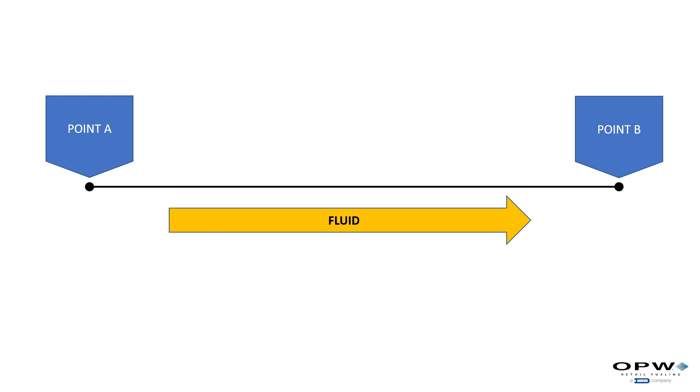So actually the way a gas station works, it's pretty simple. It's basic fluid mechanics or fluid dynamics. We're really just transferring liquid or fluid from point A to point B. But in our case, that liquid is gasoline or diesel or some other type of fuel. So we'll go over what happens in between there, how we keep that liquid out of the ground, how we keep those vapors out of the air, and the individual components that fall into place as we transfer that fuel from point A to point B, or from the tank to your vehicle.

So when we first did this video about 8 years ago, it ended up being about an hour long. There's a lot of information to cover.

But what we wanted to do this time is kind of break it up into segments or modules. So you can watch one segment and then maybe come back, pick up on the second one, and then pick up on the third one. Or of course, you can always just watch all 3 or 4 consecutively if you'd like.

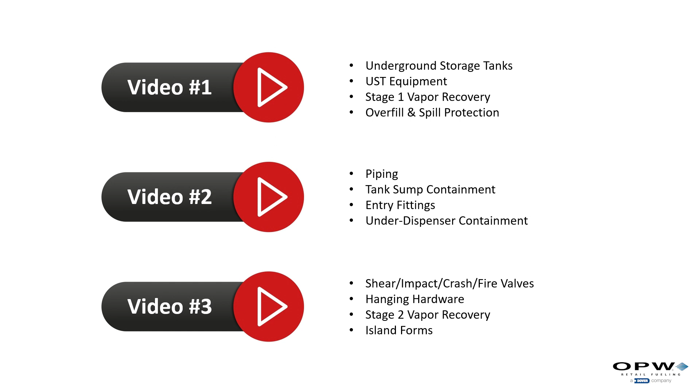So there's really 4 components or 4 things that have to happen at a gas station to be able to get our liquid or our fuel from point A to point B. Number one, we have to have a way of storing that fuel in some type of vessel or container. That way it's there when we're ready to use it. Number 2, we have to have a way of refilling that vessel or that tank. Number 3, we have to have a way of transporting that fuel from point A to point B, or from the tank to our vehicle.

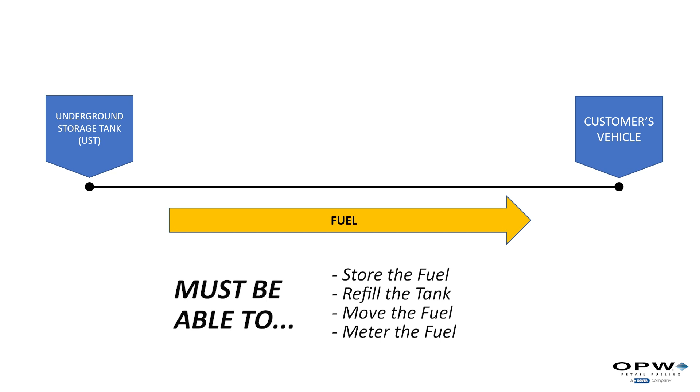And then finally, we have to have a way of measuring that fuel as it leaves the system and goes into our vehicle. So that's kind of what we'll focus on and how we'll break down our segments throughout the video. So let's talk about that first component, and this will be the first segment of our Retail 101 video. We're going to talk about how we store that fuel in the ground.

So in the case of retail fueling sites or gas stations, the way we store that fuel is in what we call an underground storage tank, or a UST. So I'm warning you right now, throughout this video, the petroleum industry uses a lot of three-letter acronyms. So I'll try and explain them as we go on. So the first one will be UST, underground storage tank. And that's where we put the fuel at the gas station.

And there's a couple reasons why we put that fuel in an underground tank versus an above ground tank. First of all, these tanks are pretty large. They can hold anywhere from 8,000 to 30,000 gallons of fuel. So you can imagine a tank that large sitting above ground is going to take up a lot of room or a lot of space at our convenience store. Plus, it's a lot safer if we just put them underneath the ground. They're less likely to be hit by other vehicles or crazy things that can happen above ground. So, really from the very beginning, we put these things underground.

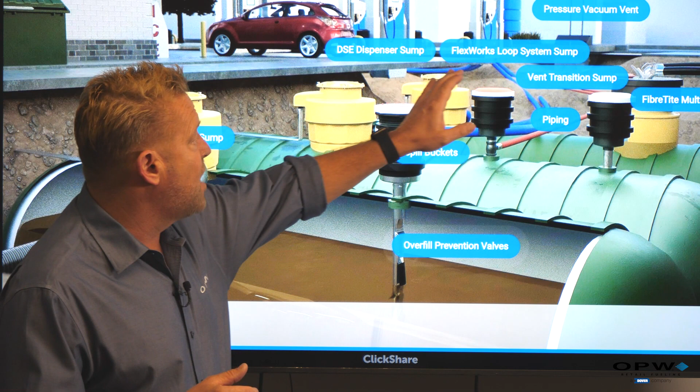And they're typically buried anywhere from 3 feet to 6 feet under the ground. Over top of them will be what we call a tank pad, it's usually about 6 inches of concrete. And then on top of that tank, we fill it with what's referred to as backfill, some type of rounded gravel or pea gravel, or sometimes they use sand depending on where the tank goes. But we put these things in the ground, like I said, to keep them out of the way and kind of keep them safe.

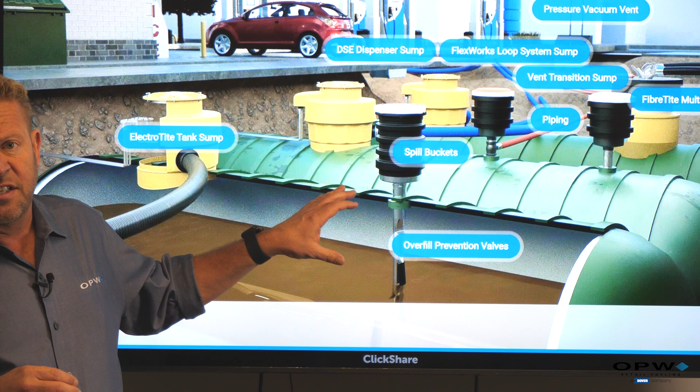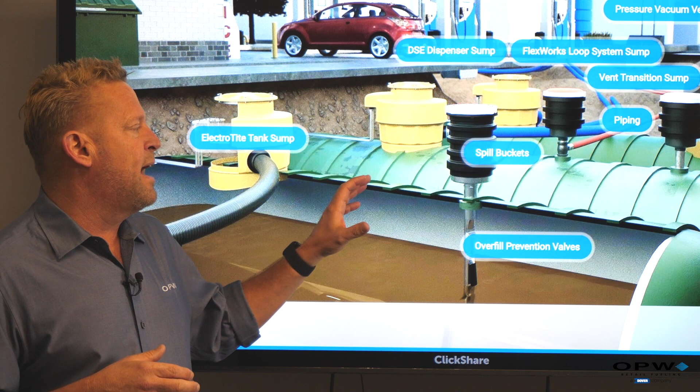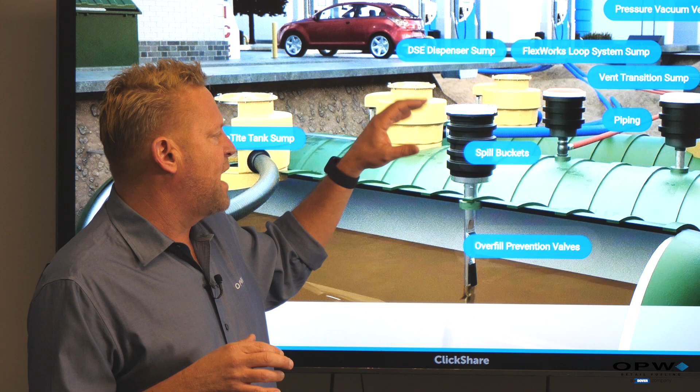In the early days, these tanks were made of steel. Again, large steel tanks that they buried in the ground. But if you think about it, the problem with steel: underground environment, a lot of moisture, groundwater, a lot of different things happen. So steel tanks were susceptible to corrosion, not only outside, but inside as well. With gasoline and water, water is actually heavier than gasoline. So many times throughout the system, if there's leaks or something happens, these tanks will end up getting water in them. And what happens is the water goes directly to the bottom of the tank, so the tank can also rust from the inside or the bottom out as well as the outside.

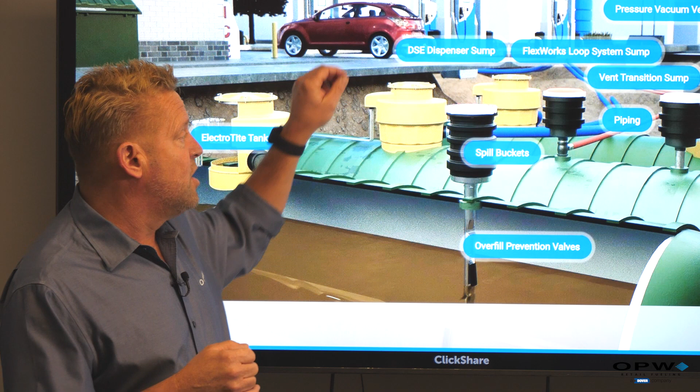So originally the industry started to try and protect the tanks from corroding by what they called cathodic protection. They put these, they're called sacrificial anodes, around the tank system, and these anodes were down in the ground. And the idea was, through chemistry and electricity, the anodes that would cause corrosion on the tank would actually be attracted to the sacrificial anodes and rust those out versus the tank. They were a little cumbersome, required a lot of inspection and testing.

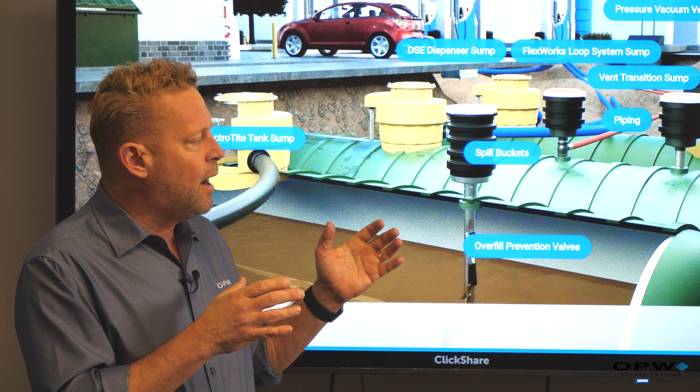So what the industry decided to do was kind of move from steel, or at least find better ways of protecting the steel. So a lot of the steel tanks, what you see now is a steel tank will be wrapped or lined with some type of composite material, whether it's a fiberglass material or some other type of composite material, to try and protect the steel tank from corrosion, like I said, both outside and inside.

But now, primarily, a lot of the underground storage tanks that we see going in the ground are made completely of fiberglass. Fiberglass is a good material. It's easy to form in big shapes, and it's completely resistant to corrosion and all the nasty things that happen under the ground, and also some of the crazy things that happen inside the tank with different additives and fuel types. So fiberglass, whether the entire tank is made of fiberglass or whether the steel tank is lined or coated with fiberglass, it's kind of the norm for today as these things go in the ground.

Originally, these tanks were just a single wall, but the EPA, and there's another three-letter acronym that I use quite a bit, EPA, again, their job is to protect our environment. So a lot of these tanks, when they started leaking, the EPA said, okay, we need to try and correct this. So EPA started requiring double wall tanks, and we'll use double wall a lot in this video because it applies to a lot of the other components, but we'll first start with the tank.

So what I mean by double wall, it's basically a tank inside of a tank, or a tank outside of a tank. So the idea is you have a primary container, and if that container fails, you have a backup, or what we call secondary containment. And that makes these tanks a little bit safer in the ground, less likely to leak.

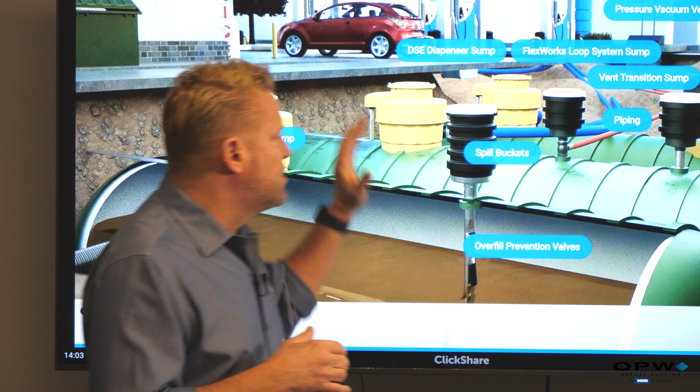So our tanks, double wall, usually either made of fiberglass or coated or lined with some type of fiberglass. We bury those things in the ground. Typically 3 tanks is pretty common. We'll have one for each type of fuel. Usually one tank will be for the regular fuel, one tank will be for the premium fuel, and actually they kind of blend those at the dispenser to make the mid-grade, but we'll talk about that later. And then maybe our third tank is diesel or some other type of fluid or fuel that the site wants to sell at their station. So we bury these things below ground.

So as they're sitting under the ground, the next thing we'll talk about is these tanks need to breathe. Gasoline, actually, the thing that's fascinating about gasoline is it's a liquid that really, really wants to be a gas. That's why it's really a good fuel in internal combustion engines and burns very efficiently in those types of engines, because it wants to be that vapor or that gas to ignite, and it's what, like I said, moves our internal combustion engines. So what happens is, as gasoline sits in that tank, it begins to vaporize and become vapor. But as that happens, it actually builds up pressure.

I think a great example of this is if you think about the gas can that's in your garage. If you've got a plastic gas can, and if it sits over a long period of time, you see it kind of starts to bulge a little bit or stick out a little bit. And then when you open it, you'll kind of hear it release pressure. Well, what that is, that's the gas sitting in your gas can, and over time, it starts to vaporize or evaporate and build up pressure, and that pressure needs to be released. Well, the same thing happens with our underground storage tanks. As they sit, gasoline vaporizes and builds up pressure.

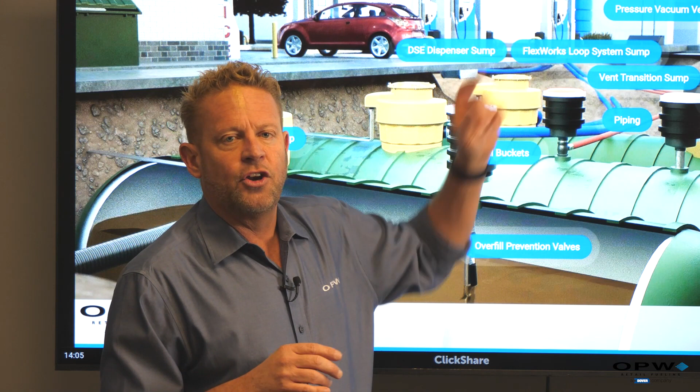So if those tanks were tight and we allowed them to build up pressure, that could create a problem. The tank could crack or explode, heaven forbid, and we'd have a nasty situation. Again, everything we're trying to do here is to keep gasoline out of the ground. So how these tanks breathe, we do it through a vent line. So there'll be a vent that's attached to the top of the tank and goes to what we call a pressure vacuum vent.

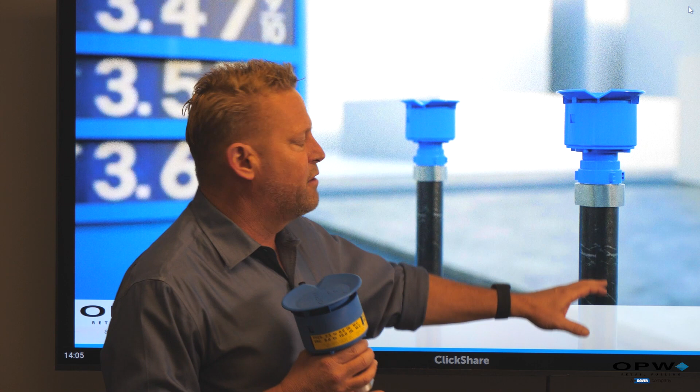Our vent line comes from the tank, and then it transitions underground, and then this is what we refer to as a vent stack. It's usually a 2-inch piece of galvanized steel. It starts underground from the vent pipe. Vent pipe's usually made of fiberglass or some type of flexible pipe material, and it comes up above ground, and the pressure vacuum vent is actually what allows that tank to breathe or maintain equilibrium or try and get as close to barometric pressure as possible.

And so the other thing that happens, if you think about an underground tank, is not only as the fuel sits there, it builds up pressure, but as people fill their vehicle, we're pulling that liquid out of the tank. So think of a milk jug. As liquid goes out, if nothing replaces that liquid, the thing will start to implode or cave in. So that's the other thing we want to try and prevent, is as liquid's pulled out, that tank builds up a negative pressure or a vacuum. So we need to keep that whole tank in equilibrium.

And that's the job of this little guy here called the pressure vacuum vent. It sits on top of the vent stack, and its job is to maintain the pressure within that tank. So the EPA, along with some of the Air Resources Board, specifically CARB, they kind of set the standard of how much pressure we want to keep in that tank before it opens. Obviously, you don't want it open all the time because the gasoline vapors would just be going into the air and causing pollution. And you don't want to have too much of a negative pressure. So these things need to open at various pressures or negative pressures or vacuums. So they kind of set what those ranges are.

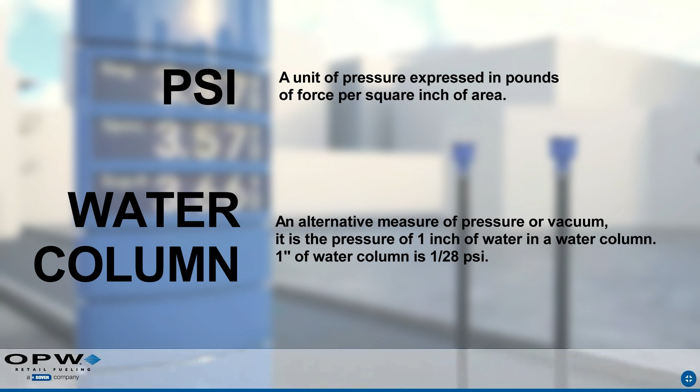And the way we measure these, it's in really small increments of pressure. You probably know what a PSI is, a pounds per square inch. Well, the way we measure pressure in a tank is with inches of water column. And just to give you an idea of how small of an increment this is, there's approximately 28 inches of water column in 1 PSI. So we're talking really small amounts of pressure or vacuum. So this vent is actually set anywhere between 2.5 and 6 inches of water column. So when the tank reaches over 2.5 inches of water column, it opens.

And the way these work, the pressure, it's simply just a weight with a seal at the bottom. So that weight is designed to be tight, everything under 2.5 or 3 inches of water column. But as soon as we get greater than that, the weight would lift up or crack, and that tank would kind of come back into equilibrium or come back into pressure.

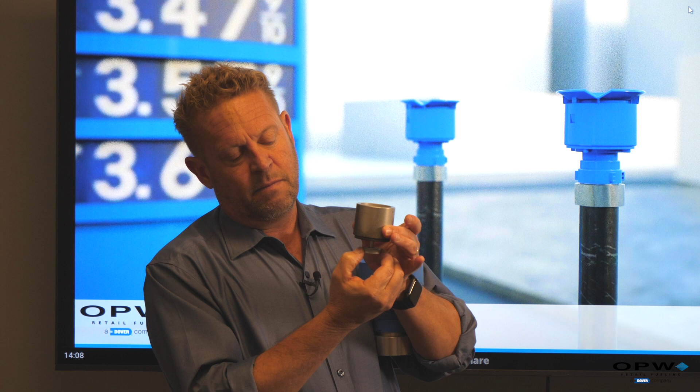So on the opposite end of that, as we take fuel out of the tank, we build that vacuum or that negative pressure, and this vent is actually set at between 6 and 10 inches of water column, which would be basically a negative pressure or a vacuum. And the way that's regulated is on our vent, there's also what we call a poppet that's spring-loaded, and as we reach that vacuum level, the poppet will be drawn down, and the tank again would be kind of brought back to equilibrium. There's a screen in there that just keeps debris out, and then obviously a cap because we want to try and keep water out of the tank.

So when that liquid becomes a gas or a vapor, those vapors are comprised of hydrocarbons. And actually the term that we use, another three-letter acronym for you, is a VOC, a volatile organic compound. And as those gasoline vapors get into our atmosphere, that's kind of what creates a lot of pollution and smog. So the EPA and the Air Resources Board, they monitor air quality, basically county by county in each state, and make sure that there's limited numbers of these VOCs in the air and the atmosphere to try and eliminate or knock down as much pollution and smog as possible. So again, we want to try and keep those gasoline vapors out of the air, and the pressure vacuum vent is one of the ways that we do this.

So if you pull up to a gas station, it's pretty easy to identify and see these. Like I said, they're 2-inch pieces of pipe that come up from the ground. There's usually one per tank, so you'll see 3, 4, or 5 lined up.

They typically put these vent stacks on the edge of the property, or they may be on top of the canopy or on top of the store. But if you notice, they're always kind of raised up above. There's actually a requirement that this pressure vacuum vent on top of the vent stack needs to be at least 12 feet in the air.

And the reason that we do that is gasoline vapors are actually heavier than air. So if we had that vent releasing some of these vapors as it opens to bring the tank into equilibrium, if it was low to the ground, the vapors could collect around the ground, and if someone walked by with a lit cigarette or something, we could have a bad situation, an explosion, and so we want to try and prevent that.

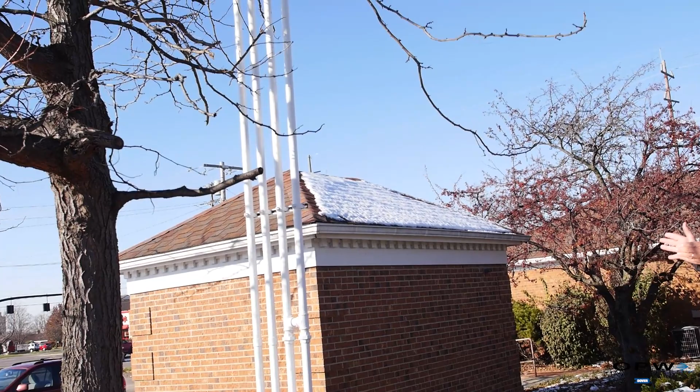So behind me are the vent stacks. They're usually at the very edge of the property line. You can see that they're more than 12 feet up in the air, and again, that's to disperse the vapors. This particular vent stack has two pressure vacuum vents up there. That would be for the unleaded and the premium tank, and the other vents are actually open vents for the diesel tank. Remember, diesel doesn't vaporize like gasoline, so diesel can have just an open vent. It's not required to have a pressure vacuum vent.

So these are what our vent stacks look like, at the edge of the property line and at least 12 feet above grade. So that's how we store our fuel. Big tanks underground, a vent line, and some type of pressure vacuum vent or an open vent is what keeps everything in equilibrium and keeps our tanks from exploding or imploding or cracking or causing a mess.

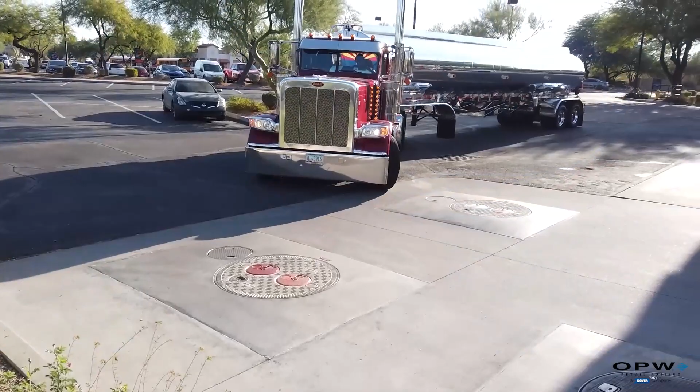So we have these big tanks underground, anywhere from 8,000 to 30,000 gallons of capacity. But how do we get fuel into those tanks? As people fill up, those tanks empty out, so we need a way to get fuel back into them. You've probably seen the big transport trucks. They're usually big stainless steel things going down the road, and they come from a terminal, and this is how we get our fuel to the site and into the tank.

All these tanks have a series of openings on top of them when they're manufactured. These openings are traditionally 4-inch. It's a female NPT flange or fitting that's built into the tank. We actually call it a bung, a bung fitting or a bung opening. And on these 4-inch fittings, what we have is called a riser pipe.

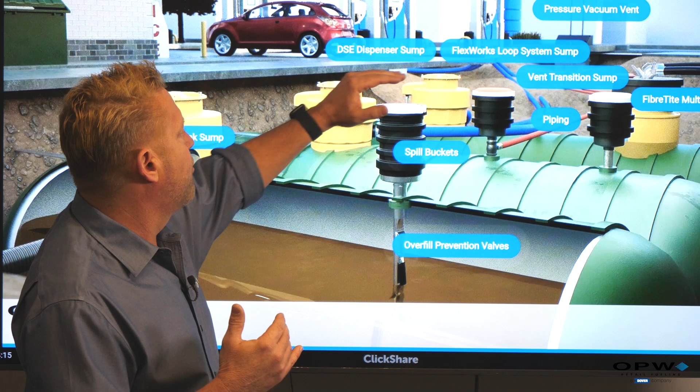And it's a 4-inch, usually steel pipe, Schedule 40 or galvanized pipe that goes from the tank to the surface, or to our grade. We refer to the surface here as grade or grade level for our tank pad. So how we access the tank in many different ways is in these 4-inch riser pipes that come up from the top of the tank, and it gives us access at grade.

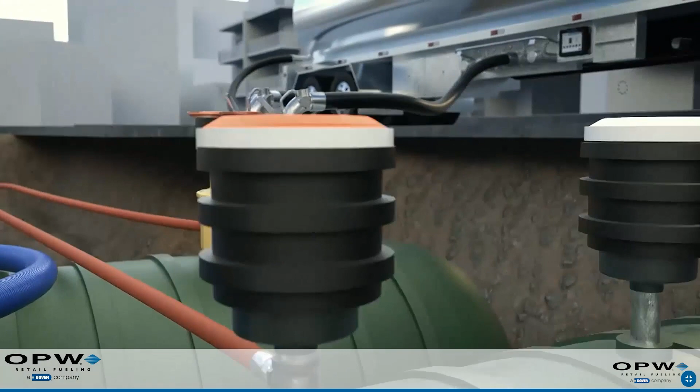So let's talk about how the fuel gets from the transport truck to the underground tank. The way this works is the transport truck hooks up a hose. We call it a drop hose. It's usually a 4-inch hose that it'll hook up to the truck itself. It comes through a hose, and then this valve here is called a drop elbow. It's almost like a big nozzle, if you will, but it's 4 inches, and it connects to what we call an adapter.

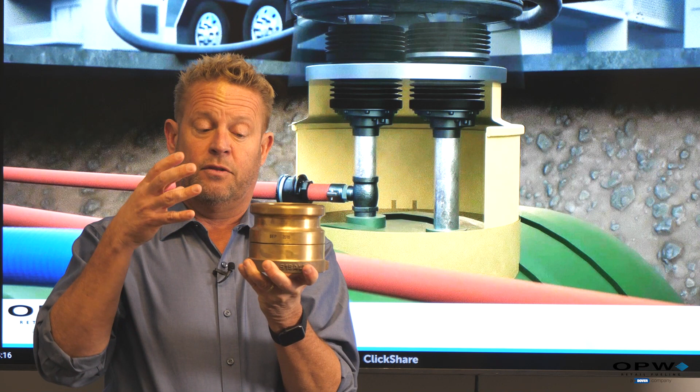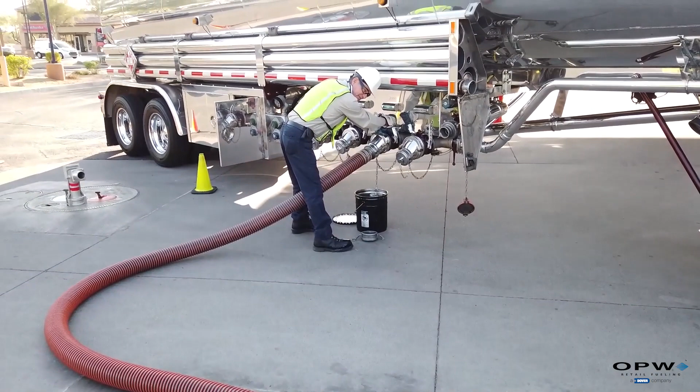And it's usually made of brass or bronze. The reason is that drop elbow is a different type of metal, and so you want bronze or brass to prevent it from sparking. Obviously, sparks at a gas station are not good, especially when we're dealing with large volumes of gasoline or vapors. So there's an adapter. We call this a tight fill or a tight adapter, and that drop elbow will clamp on there. Once he's clamped on the tight adapter, he'll go back to his truck, open a big valve at the truck, and now the fuel flows from the tanker truck down into the tank.

And the way that happens is there's no pumps really involved. It's just pure gravity. Think about it, the tanker truck is sitting up high, the tank's below ground. So as he opens up that valve, gravity just drains the fuel down into the underground storage tank, or our UST. Most of those tankers are usually compartmentalized, so one part may carry different grades of gasoline, and one part is diesel. So if you see these tanker trucks, you may see several of these valves on the side of the truck, and those are all different types of fuel as they drop from the tank into the underground storage tank.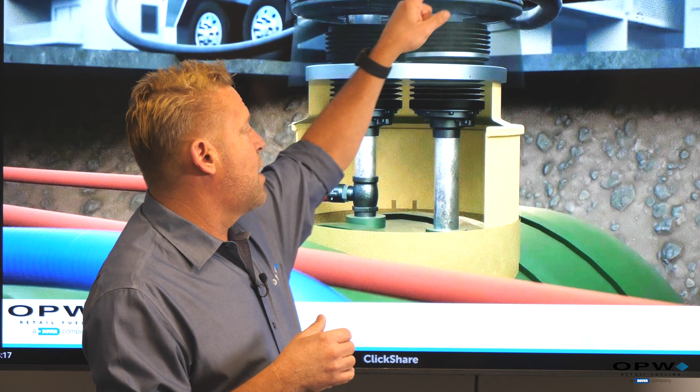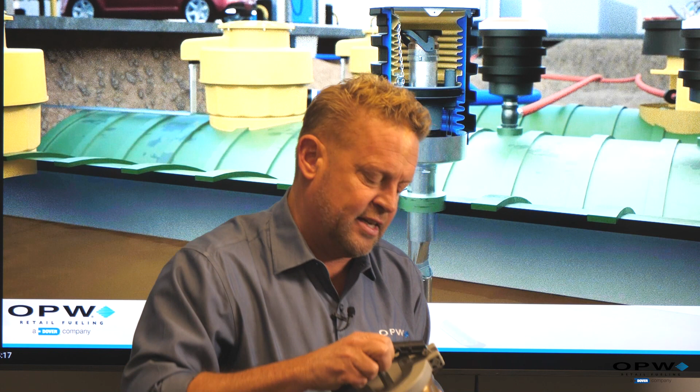Originally, when these tanks were filled, our 4-inch riser pipe came up from the top of the tank. We had our adapter threaded on top of the tank. Our adapter has a cap on it when it's not being used. Again, we want to keep those vapors inside the underground storage tank. So there's a tight cap that goes on our adapter. But this basically just came up from the ground at grade level, usually in some type of box or just a manhole cover to keep the backfill away so you could get your drop elbow on. So every time the driver made his drop and pulled off, there's always a little bit of residual fuel left in that drop elbow or the hose, and it would drip down and end up in our backfill.

A lot of the EPA regulations that we talked about actually came to be in the early to mid 80s as the EPA really got involved, noticing a lot of groundwater pollution, and a lot of it was coming from retail gas stations that had been in the ground for years operating in this manner. As they began to study where the fuel was coming from, they found out most of the fuel wasn't coming from leaking tanks or leaking components of the system. Most of the fuel was coming from these drops. Every time the tank was filled, there'd be some residual fuel, and over time, in the backfill, it turned out to be quite a substantial amount of fuel that caused problems.

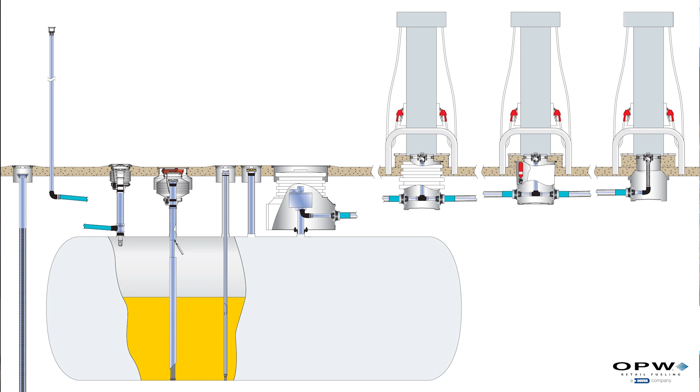So I'll go back to our other graphic here. So let's talk about our underground storage tank again and think about a couple things that happen. So if we have fuel in our tank, and if we're filling that tank, there's an area of our tank. Actually, I'll switch to another graphic here. It's a little bit easier to see on this two-dimensional drawing. But you can see we have our underground storage tank, and part of that tank is liquid or fuel. And everything above that is the empty space. And again, that gas has been evaporating or vaporizing. So what we have in that empty space above is gasoline vapor.

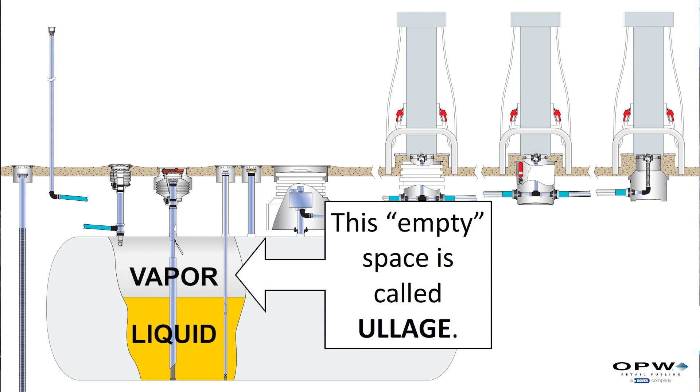There's actually a name for that empty space between the liquid level and the top of the tank. It's what we refer to as the ullage of the tank, or really how much capacity is left in that tank. So the ullage of our tank is comprised of these gasoline vapors. So our pressure vacuum vent is doing a good job of keeping those vapors in there unless the tank reaches a point where it needs to go back to equilibrium and the pressure vacuum vent opens. But primarily those vapors just sit there.

So if you think about this, as a drop happens, that liquid level is rising up, right? So those gasoline vapors are being displaced. They have to go somewhere. If we kept the whole system tight, the tank would crack, or we'd build up too much pressure in the system. So going back to the early days of gas stations, when a driver would fill the tank up, all those vapors that were in the ullage of the tank would basically just travel through the vent pipe and go right out the vent stack. So as he filled up, all those vapors were coming out at a pretty high rate into the atmosphere.

And again, it goes back to the late 70s, early 80s, as the EPA is trying to get a handle on pollution, and they started looking around saying, okay, wow, we got a lot of VOCs that are coming from these fuel stations, and every time a tank is filled, it's emitting all these hydrocarbon vapors. So the EPA told the industry, all right, petroleum industry, you got to figure out a way of controlling this. So what we came up with is what's referred to as stage 1 or phase 1 vapor recovery.

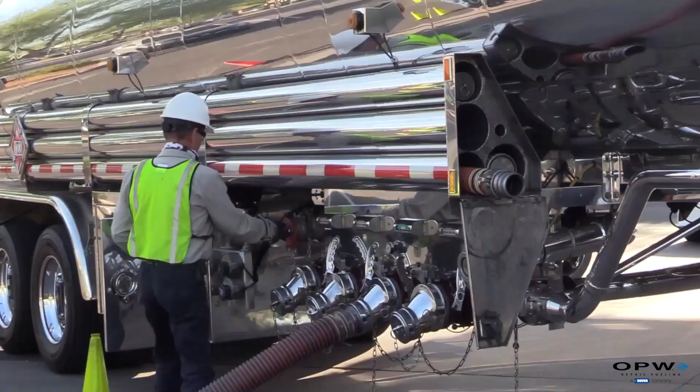So now, before the driver makes that drop, he has another hose on his truck. It's referred to as a vapor recovery hose. It's usually orange, they try and separate the two, and usually a bit smaller diameter. A vapor recovery hose is usually 3-inch. So what he does now is he'll hook up that vapor recovery hose also to his tanker truck along with his drop hose or fill hose. Because if you think about what happens, the underground storage tank is filling up with liquid and it's displacing vapors.

Well, really the opposite is happening in that tanker truck. You have a tanker truck where liquid level is now dropping, so you need to replace the liquid with air, or gasoline vapors in our case. So now he hooks up two hoses, the drop hose and the vapor recovery hose.

So what happens is, as the fuel level rises, the vapor now, instead of going out our vent stack, comes up through our vapor recovery hose and actually goes back into the tank. So he's collecting those vapors back in the tank. So everything kind of stays in balance. We prevent the vapors from getting in the air. And it actually turns out to be a good thing, because the vapors go back in the tanker truck.

And what they do is the tanker truck will take those vapors back to the terminal, and they have a pretty cool way of turning those things back to gasoline. They chill it and compress it and condense it, and they are actually able to take that vapor and turn it back into some liquid so they can resell it at the terminal. So better than going up and causing pollution, it's actually turned back into a liquid fuel.

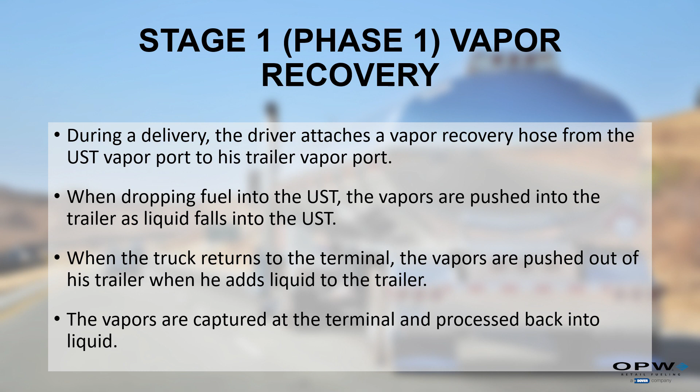So this whole process of collecting vapors from the tank during a drop is what we call stage 1 vapor recovery. So what I'm showing here is what we refer to as a 2-point fill. One point we're dropping, and the second point, we're actually collecting the vapor. So we have two different hoses. In some cases, especially in older tanks when we started requiring stage 1 vapor recovery, they may not have had enough openings on their tank to have a 2-point. So they will use what's called a single point fill.

And the way that works is there's one riser pipe and one hose, but the hose is actually what we call coaxial. Coaxial meaning kind of a hose within a hose. So on a single point, the fuel drops down the center, and the vapors come up on the outside of our riser or our drop tube, and then they go back through the hose. Again, in the center of the hose is fuel, and the outside is vapor. So they collect them through a coaxial drop tube. Actually, I have a graphic here that shows what that coaxial drop elbow looks like. You'll see the two hoses that kind of come up from there.

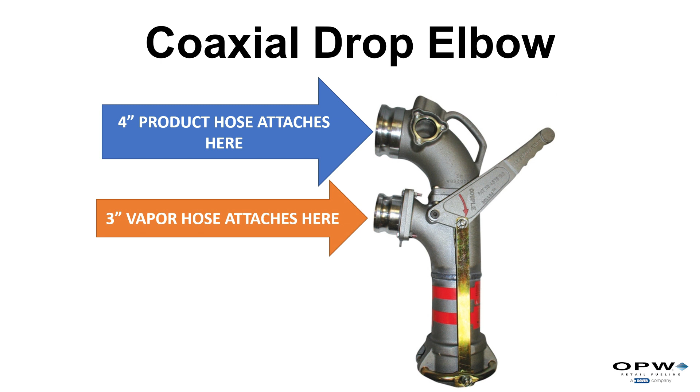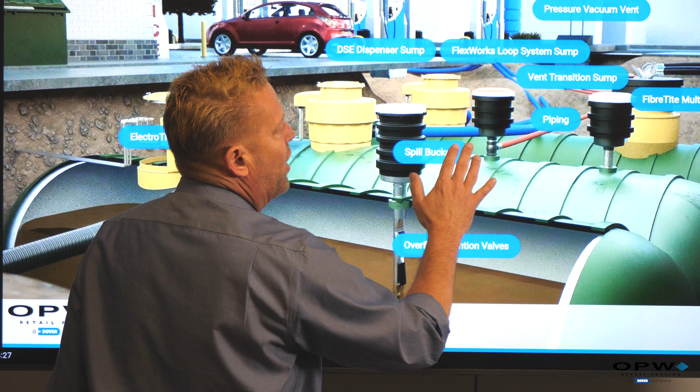These are actually pretty common in California, New York City. You'll see a lot of states utilize these, and the reason they do these is because you actually can have access to the top of this tank and your risers because you have this big chamber here. So that's what's referred to as a multi-port. But on the other type of fueling sites, this would be a little bit more typical. This would be our 2-point, where we have a spill bucket here and our vapor recovery spill bucket here, and the driver would hook up.

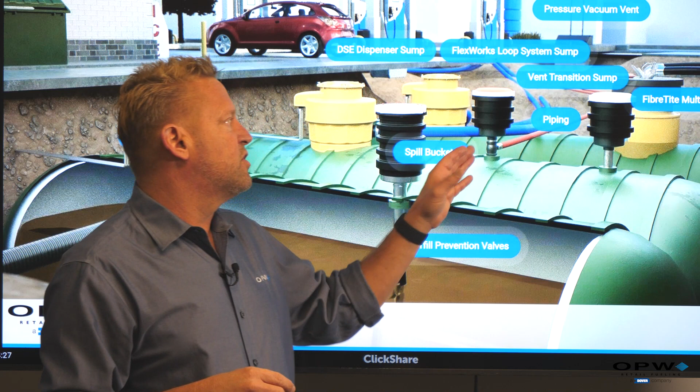Now at the stage 1 vapor recovery point, that can either be a spill container, or many times it's just a manhole to house that vapor recovery adapter. Because if you think about it, we're not dropping product in there, so if everything goes the way it's supposed to, you shouldn't have any fuel coming out of that riser pipe where our vapor and our vent pipe is. So that could also be just a standard manhole.

So stage 1 vapor recovery is a way for us to collect the vapors and keep them from going out into the atmosphere, and that's how we get our product from the tanker truck down into our tank to be used and sold down the line as you pull up and fill your car up. So we talked about how we get our fuel from the transport truck and into our underground storage tank. But let's think about this.

What happens if that driver's not paying attention? He opens up his valve, he starts filling the tank, doesn't pay attention, and that tank fills up. Or, say we have 4,000 gallons of ullage left in our tank, and he's got 5,000 gallons in his tanker truck and just starts filling and not paying attention and overfilling the tank. Well, believe it or not, it actually happened quite often in the 60s and 70s.

So again, getting back to the 80s, not only were the 80s the best decade for music, the best genre for music, but the 80s were kind of when the EPA really started realizing, okay, we have to start regulating and doing some things and adding equipment at these fuel stations to try and protect our environment. So again, going back to the 80s, a lot of these were specifically written in 1988, and stations had 10 years to comply, or everything new starting from that had to have these types of equipment.

So we talked about a spill bucket. So at that exact same time, the EPA said, okay, we have a way of protecting from overspill, but we also need a way to protect from overfill. And so transport truck drivers were aware when the tank reached capacity or was about to reach capacity and didn't overfill. You think about what happens if that tank overfills, where the fuel goes: it usually would run up the vent pipe and end up spewing out the vent stack, or if there were other openings somewhere in the tank, fuel would come out and then end up in the ground.

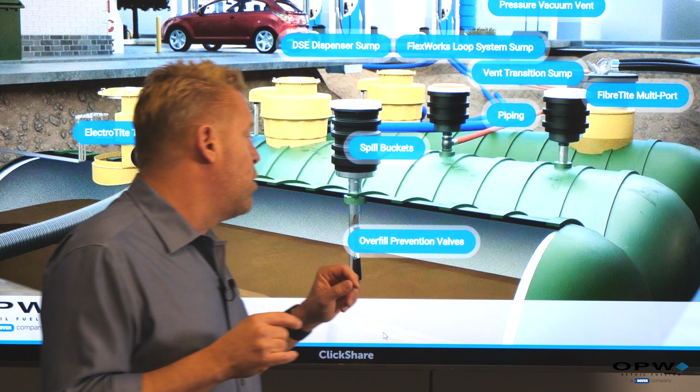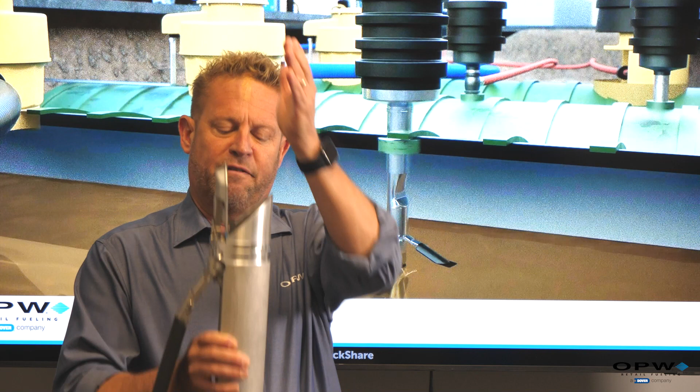The second way, and probably the more popular way, and I'll tell you why, is with an overfill prevention valve. The overfill prevention valve is a valve that's down in the tank, usually has some type of float mechanism. Actually, I happen to have one. What happens is, as the fuel rises in the tank, again, we set the float at about 95% of capacity. How that's accomplished is when the tank is installed, a contractor, these will be assembled in the field, knows the distance of the tank from grade, how deep it's buried, and then the diameter of the tank. So he'll adjust, there's a tube that goes up above here and a tube that goes below here, to make sure that this float sits in the tank right about 95%.

So what happens is, as the fuel comes up, this float will rise up, and you'll see this poppet here, and basically that poppet ends up in a stream of fuel coming down. Typical drops are about 400 gallons a minute. So fuel's coming down, fills up, this goes in the flow, slams shut, and as it slams shut, it kind of shakes the hose a little bit or shakes the truck. So again, alerting the driver, okay, I'm at 95%. Let me shut off the fuel coming out of my tank and going to my hose. I can drain my hose down in the tank, and I know that the tank is full.

So the advantage of an overfill valve versus an overfill alarm is an overfill alarm requires the driver to take action. An overfill valve, you think about it, that thing floats up. Even if the driver doesn't shut the flow of product off, this float will reach a point where no more fuel can enter the tank. So even if the driver doesn't take action, the overfill valve will prevent the tank from being overfilled.

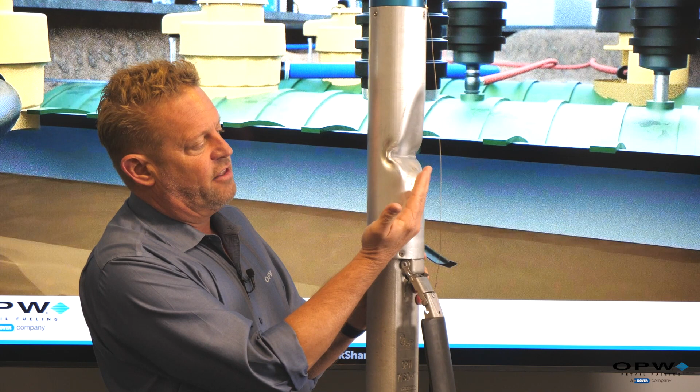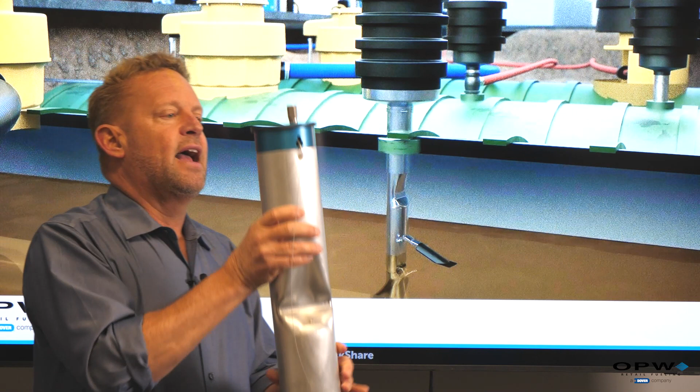And the way that these things work, again, there'll be a tube, our poppet stays inside here outside the flow of product, and this tube would come all the way up and go inside of our spill container, and then there'll be a bottom tube down here that goes all the way to the bottom of the tank, and that's what's referred to as a drop tube. And the reason we do that is we want that drop tube to go all the way down and be below the level of the liquid.

If we didn't have a drop tube, if we just dropped gasoline in the tank and it came right to the top of the tank and just splashed down, that splashing would cause excessive vapors. Again, it would cause excess pressure buildup in our tank. So when we do these fills, we make sure that the drop tube is always below the liquid of the tank. So those things usually sit about 6 inches from the bottom of the tank.

So now as the product comes down and fills, it's below the surface, so the level inside the tank just slowly rises up, and we don't have a bunch of turbulence, and it minimizes the pressure buildup in the tank and the vaporization during a fill. So, two things that we're trying to prevent: overspill and overfill. An overspill bucket and an overfill valve.

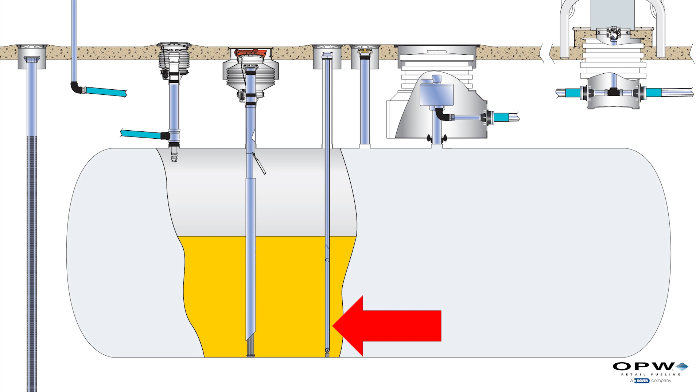So let's talk about some of the other openings on top of this tank. Like I said, these are all usually a series of 4-inch bung openings that they put on the top of the tank as they make it. So we'll go back to our two-dimensional graphic here that shows some of these other openings. So if you look at this one, what's down in this opening is what's referred to as a tank probe. And a tank probe is electronically connected to, guess what? Another 3-letter acronym, an ATG, an automatic tank gauge.

And what that does is that probe goes down into the tank. It's called a magnetostrictive probe. It's a metal probe, and then there's a float. And as that float rises with the level of the fuel, the magnet senses the position on the rod, sends a signal back into the store where there's a whole automatic tank gauge, a series of software, and a computer that monitors and measures the level of that fuel.

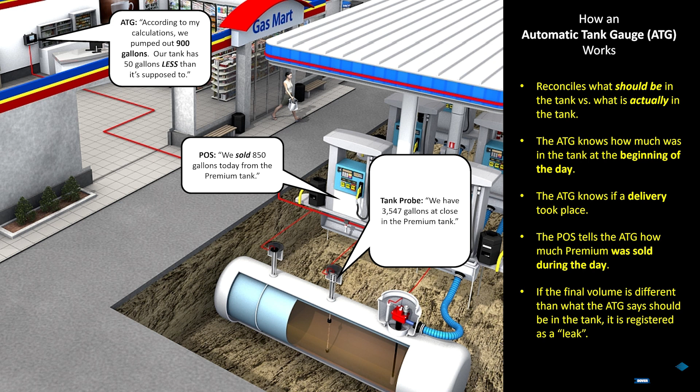If we only sold 850 gallons and we pulled out 900 gallons, what happened to that other 50 gallons? Maybe something needs to be inspected to see if there's a leak somewhere in that tank or somewhere in that system. So our automatic tank gauges act as a way to look at the level of fuel, and also as a way of detecting if there's any leaks in that underground storage tank.

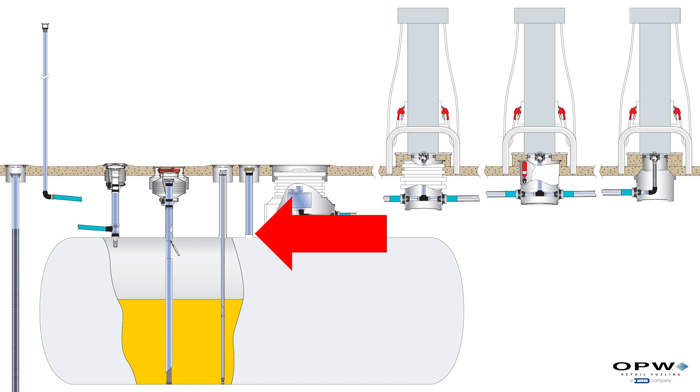So moving down, you'll see the next opening, another probe coming down from grade, and you see this one stops right at the top of our tank, and what that will be is an interstitial sensor, or a probe that goes down and monitors that interstitial space in our tank.

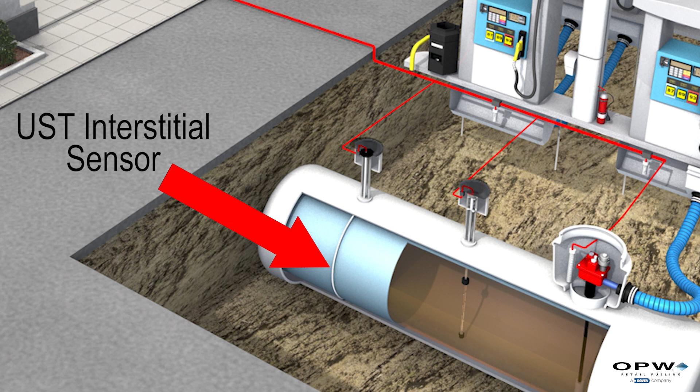Again, another way of determining whether that tank may or may not have a leak in it. We want to monitor that space, and that's what that opening there is. And usually at surface, anywhere from a 12-inch or an 18-inch manhole cover will actually encase the tops of those probes or the tops of those sensors at the forecourt or at our tank pads.

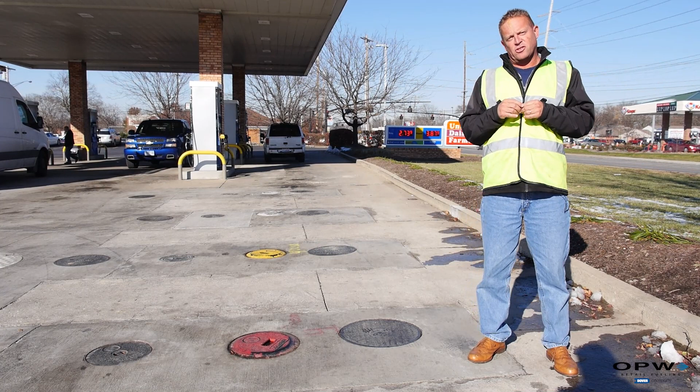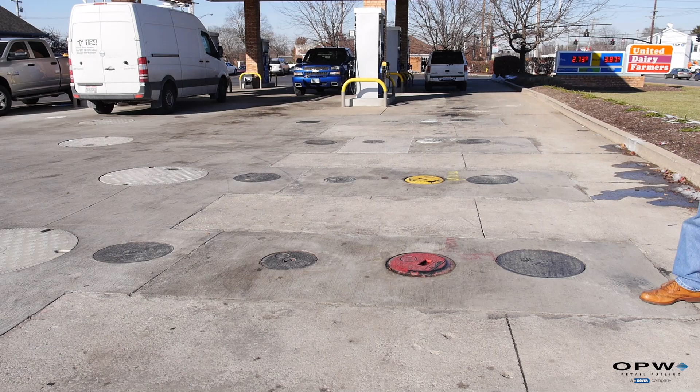So we thought we'd bring you out to an actual site and see what those components look like when they're on the tank pad. So I'm actually standing on a tank pad right now. You can see the series of manhole covers in a row, and by looking at that, you can tell exactly where that tank is laid out. So right here I have 4 tanks laid out in this direction. Down through here, and then the last one through there.

And one of the easiest ways to tell what type of product is in each tank is by the spill container color. There's an API code, American Petroleum Institute, that designates specific colors for the specific type of product that's in the tank. So the tank that I'm standing on right here, you see this is our spill bucket cover, is painted red. So that's telling me that this tank has premium fuel in it. The next tank down here, the spill bucket cover is yellow. So that tells me that there's diesel product in here.

And then the next 2 tanks, the spill bucket covers are colored white. So that's telling me that's the regular or standard unleaded product. So here they have 2 tanks with unleaded fuel that are probably manifolded together. Obviously they sell more unleaded fuel than the others, so many times they'll put 2 tanks in to meet the demand of the higher volumes with that type of product.

So the manhole covers that we see here, this first one probably is some type of monitoring probe underneath there. The next cover here is our spill bucket, which we talked about on the whiteboard. This is where they actually add the product. The cover usually right next to the spill container would be where my stage 1 vapor recovery adapter is underneath. Now, typically at most stations, this would also be color-coded. The API color code for the stage 1 vapor recovery would normally be orange, so at many stations you'll see these covers painted orange. In this case, I can tell that it's just a standard manhole over that adapter.

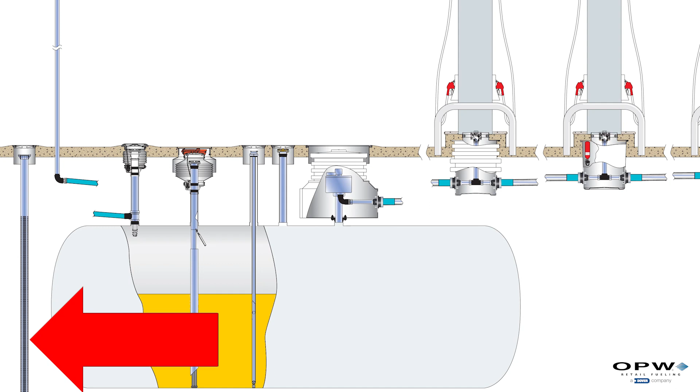I want to point out one other thing. It's not actually an opening in our tank, but if you look over here to the outside of our tank, this is what's known as a monitoring well. Really it's just a 4-inch slotted PVC pipe that goes down into the backfill that surrounds our tank pad area. It allows us to monitor the soil or the backfill conditions outside the tank. Sometimes there'll be sensors down in there, and if that sensor detects any type of hydrocarbon or gasoline, it sends a signal, and we know that there's fuel leaking into the area around the tank, and someone needs to shut some things down and start inspecting.

At the tank pad, these manholes tend to be a little bit different. They're kind of specialized. They're usually bolted down. They're white. They have a black triangle. And it's a way to symbolize, okay, this is a monitoring well. Don't open this thing up and try to put gasoline down into it. It's not attached to the tank. So it's a way of preventing fuel from accidentally being dropped down that monitoring well. That's the other thing you see coming down from our tank pad into our underground storage tank environment.

So that wraps up the first module of our Retail 101 video, which is basically all the underground storage tanks and the storage tank components, valves and fittings. So stay tuned for part 2, where we'll go into how we actually move the fuel from the tank to your vehicle.